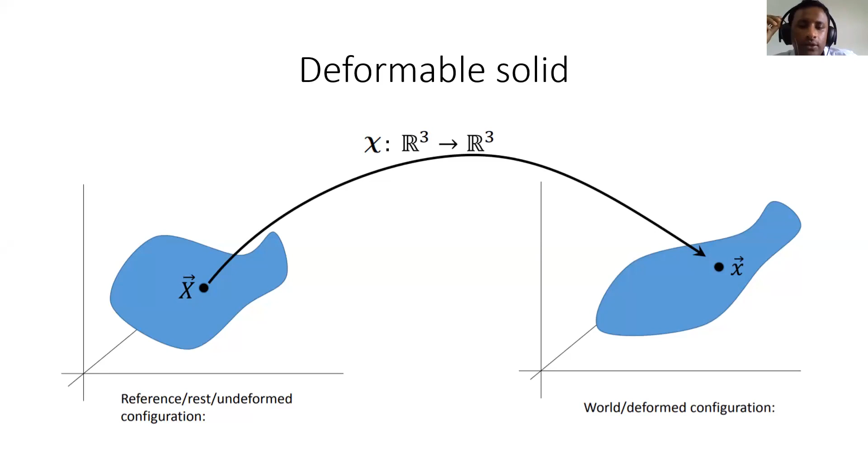Now, where do we need that then? The question is, when you actually go to solve any realistic problem of engineering interest using molecular dynamics, you will face the huge difficulty of scalability. What does that mean? Scalability means you cannot solve any engineering problem of relevance to us using molecular dynamics.

Your computer will explode. The degree of freedom for solving even a small nanometer scale problem itself becomes quite challenging using molecular dynamics. So even though it has the potential to solve everything, in reality it cannot solve almost any problem of our interest.

Now there comes the necessity of something that can be used to solve large scale problems, and that is called continuum mechanics or solid mechanics. We must have read Timoshenko's book, or Euler-Bernoulli's beam theory and all that. But basically this concept of continuum mechanics started with the work of Euler, Bernoulli, Cauchy, these great people 200 years back.

So basically what does it say? It says that solid is a continuum, meaning if I now try to show this, solid is a continuum means there is no gap in this body. Actually, if you use a microscope, you will find that there are lots of atoms or molecules in it.

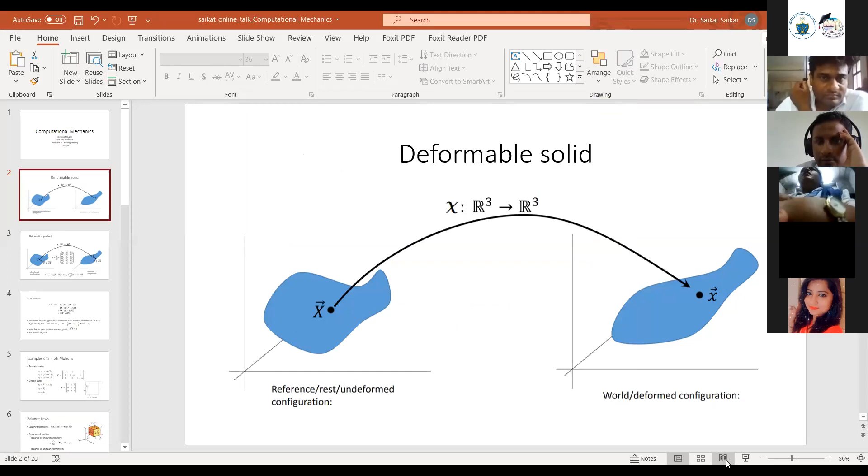Oh, I cannot, one second. Why am I not able to? I'm sorry, actually I wanted to use my pen here. Anyway, maybe that's not possible. Oh my God, why can't I use my pen? Just a second, okay, I'm trying to use a pen. I thought of using an online pen. No, anyway, that's probably not possible. Anyway.

So the point is, you see this blue body, this black is a representative point, its location is X. Now, under some deformation map, the chi is a deformation map that maps a point from R3 to R3.

What is R3? R3 depicts this three-dimensional problem: X, Y, and Z axis. X axis, Y axis, and Z axis. And then after deformation, the problem remains 3D. So that's talking about something very trivial. It's mapping something in 3D to something in 3D.

And continuum means there is no gap, so it's absolutely full, it's a continuum. So you can go to any arbitrarily close point to this point X, capital X. So that deformed point is small x, and the undeformed point is capital X. Now this is the basic point.

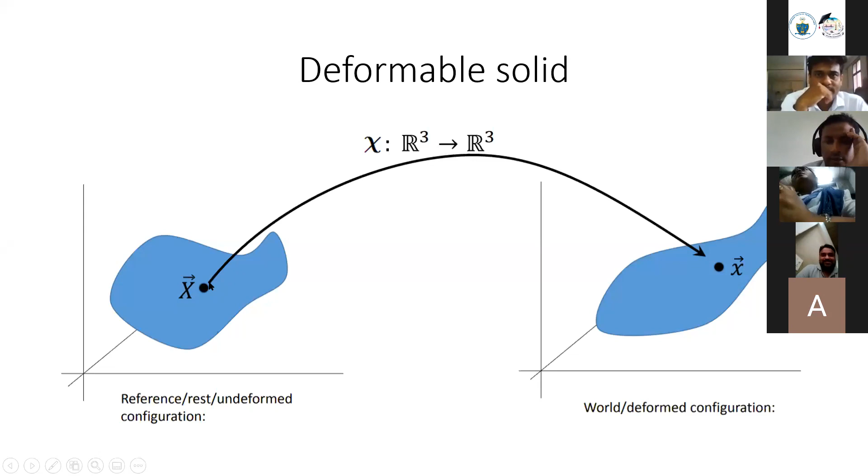But that is not possible in molecular dynamics, because in molecular dynamics atoms are realistic and there are gaps between two points. But in continuum mechanics there is no gap between two points, and that is why you can take a very close point in the neighborhood of the point X, a very small neighborhood of point X.

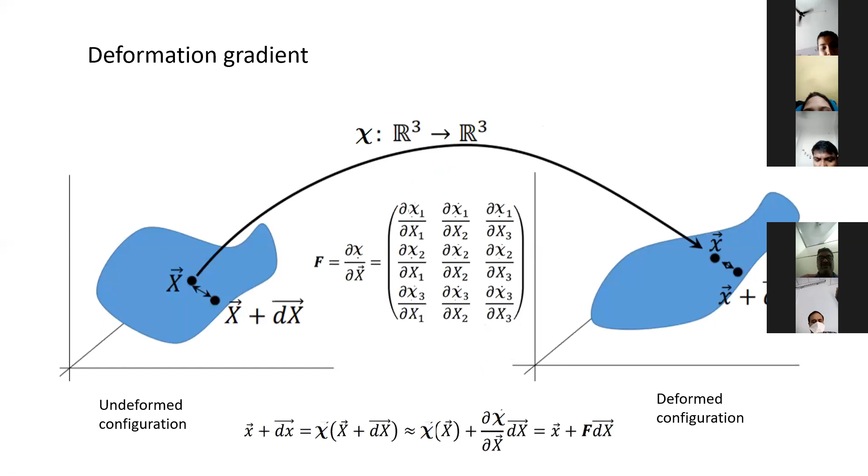So what is ds? In a continuum, a solid body, you can draw a line from any two points, right, because any two points exist. So I call this a fiber, the ds fiber. And what's the length of that fiber? The length of the fiber is small dx dot small dx. So that gives the length of that infinitesimal fiber in the deformed configuration.

And the same fiber in the undeformed configuration, its length was small d capital X dot small d capital X. Okay, in 1D it will be dx square, right? D small x square minus d capital X square. That gives you in 1D how much a fiber has stretched, right?

In 1D, the fiber initially was like this much. Then you apply some force and it expands or contracts, right? It expands. How much has it expanded? It expanded like d small s squared minus d capital S squared, square root of that.

Why are you using the square? Just to forget about mostly the sign, plus minus and all that. And in 3D or 2D, it's nothing but an inner product. In 3D, a fiber stands, right?

What's the length of the fiber? Its initial position is x1, y1, z1, and then here it's x2, y2, z2. The difference is x2 minus x1, y2 minus y1, z2 minus z1, and the norm of that. That's why I'm calling this dx dot d small x, right? And then d capital X dot d capital X is the initial length of the fiber. That's the minimum information we are trying to use.

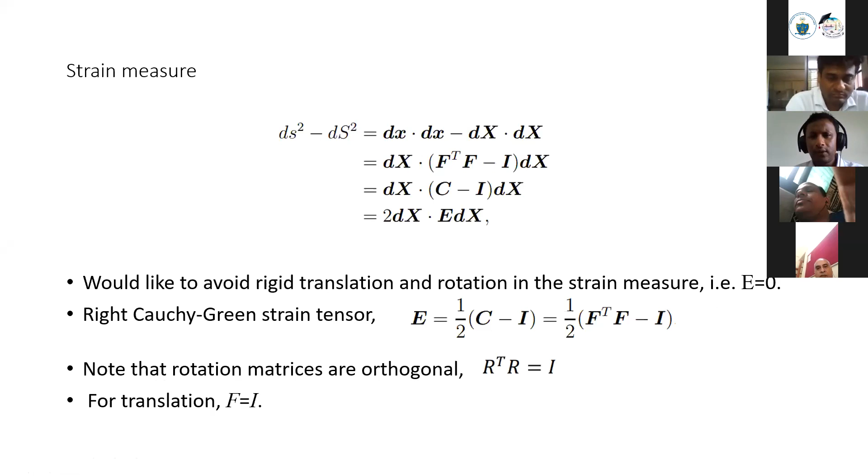And then, if I rotate it, F would be equal to R. Let's say R is a rotation tensor, rotation matrix basically. So F transpose F would be R transpose R, because F is a rotation, since you can characterize any rotation by a rotation matrix for the deformation gradient. Then you know that R transpose R is equal to I, that is orthogonal. R is an orthogonal matrix. So any rotation matrix is orthogonal, and it has a property like R transpose R equal to I.

So in that case, if you replace it here in this first expression, see, ds square minus d capital S square is equal to dx dot F transpose F, that is R transpose R minus I, which is 0. So by rotation, your fiber length cannot change. It's obvious information, but mathematically that gets interpreted like this, because continuum mechanics is all about writing equations and capturing the physical phenomena nicely, right?

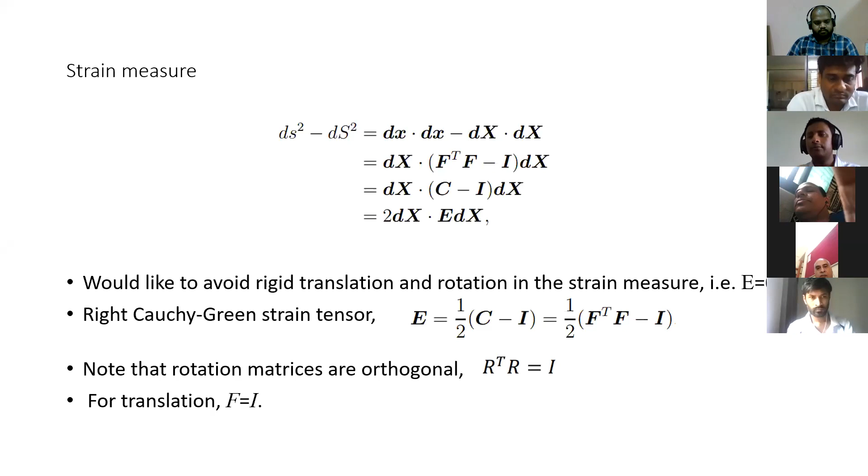So you have to make sure that you're not by mistake understanding a rotation as something like strain. That is another aspect: if you rigidly translate a fiber from one point to another, then also you're not rotating, you're just translating. Then how do you make sure? Then F is not F transpose F equal to I, but F itself is the identity matrix in that case.

Because why? Because what is F? D capital X equal to D small x equal to F D capital X. By rigid movements, your D small x and D capital X are the same. Then your F has to be identity. So by construct, F transpose F becomes identity. So F transpose F minus I is 0.

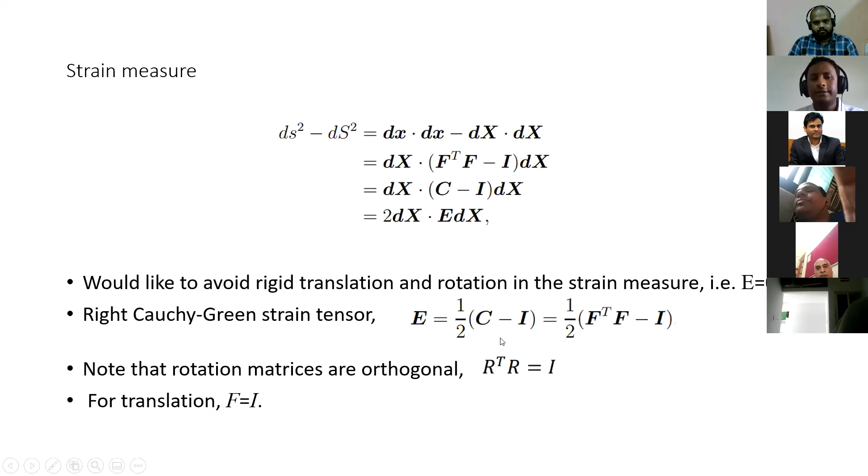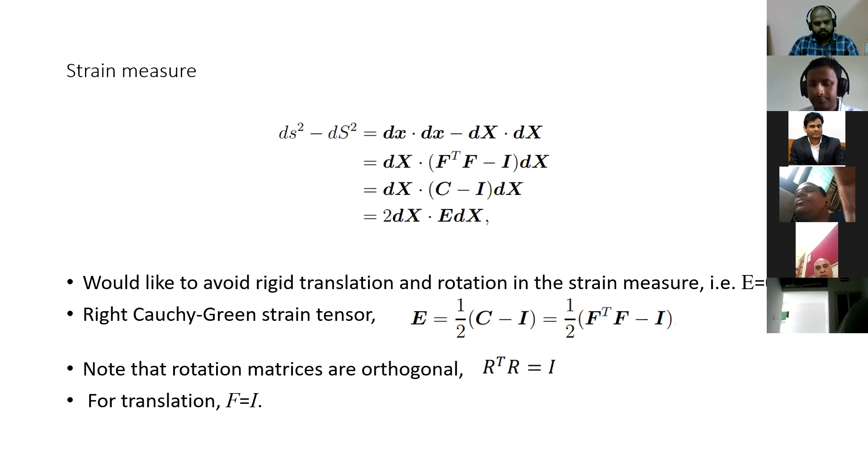So your simple ds square minus d capital S square, the stretch, the measure of stretch of a fiber, captures only the strain information of the solid continuum. That is why E is a correct strain representation. Any derivative does not need to be strain. It has certain properties. So these are the two properties by which we understand that something is a correct strain measure. Okay, with that we will go to the next.

So when we study continuum mechanics, we should start with the simplest of the problems. What is the simplest of the problems? It is pure extension. You take a bar, you pull the bar or push the bar. In this setup, how do you characterize that pure extension?

Have you ever thought? Suppose a solid, a rubber, if we pull a rubber, you see a thinning effect of the rubber on the other side. You pull it, its length is extending, but it cannot change its volume, right? It cannot change because the rubber's volume needs to be fixed. So your other dimensions need to shrink in a particular manner. That is why here I am just writing a rule.

Let us say small x1 is equal to 1 plus epsilon times capital X1. This means the initial length of that fiber, or bar, was X1, and I am extending it by epsilon amount, so 1 plus epsilon X1 is my changed length. But since I am increasing the length in the X1 direction, along X2 it should reduce: 1 minus nu epsilon X2. So the initial length was X2 in 3D, and now it has changed, reduced by the nu epsilon amount.

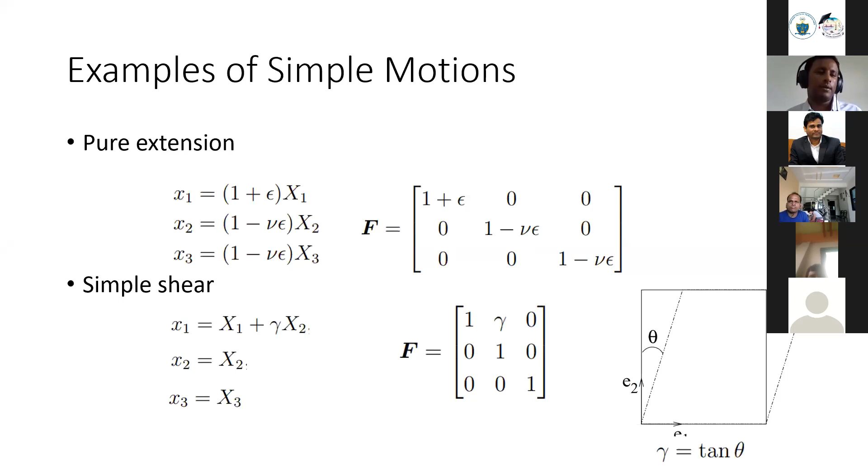Okay, so if you do that, let us come to the next aspect. I'll not take much time, but these are all big issues. So the second thing is T is equal to tau n.

What is this, T equals tau n? That's called Cauchy's theorem. So towards T, small t is traction. Just think of this famous problem. The notations are slightly different, I've taken it from somewhere anyway. So the traction on the surface.

So what is traction? Traction is force on the surface divided by the area. As area tends to 0, it becomes traction at that contact area. So on the surface, however much force you are giving, that's called traction. Now this tau is stress, so that's happening inside the body.

This, Cauchy did this derivation. T equals tau n. N is the normal vector. Okay, on this surface, so at any point on the surface, your normal vector is n and traction is t. If you know these two, you can compute how much stress it should have.

So what is stress in a three-dimensional setup? Stress is, by definition, pretty simple: force per unit area. So if you cut a section, compute the force on any plane, you will see how much of stress it is. Now, since it has 3 dimensions, it has all the components.

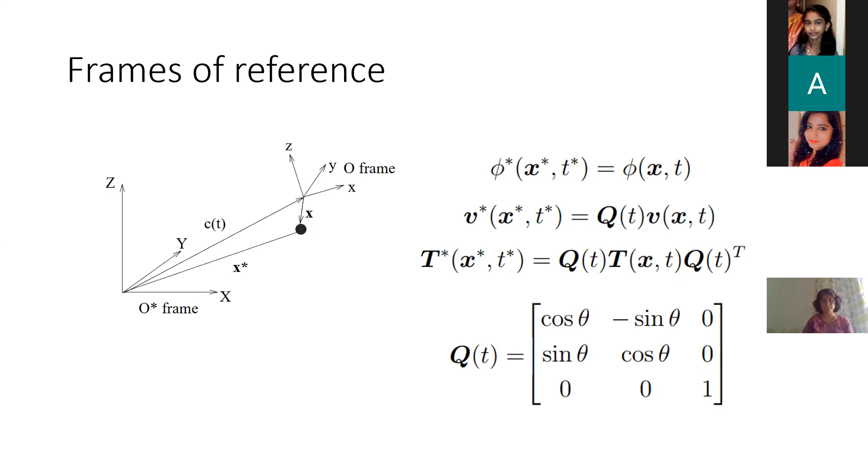Once we have done that, then comes another aspect. What is that? Frames of reference. Because you may be using solid mechanics for solving a moving car, or a merry-go-round, or a moving ship, or a building, or a bridge that's vibrating, right? So the deformation or vibration phenomena of any structure, we civil engineers call everything structure. Okay, we see it from a frame of reference; we have x, y, z, that's the frame of reference. Now if you change the frame of reference, how does the law change?

That is quite important, because if everything changes you should be careful, right? You should know what's the rule of shifting from one frame of reference to another frame of reference. Here I've given two frames of reference: one is O star, one is O. Let us say you have a scalar variable that is phi.

Let's say it is density. Density should not change by changing your frame of reference, right? Because it's a material property. But mathematically you're writing an equation, and the equation does not know whether it's density or displacement or whatever. So you should make your equation understand what is physical and what is unphysical. To do that, we have to have this extra measure.

This is the next step: to make sure that your scalar variables follow the rule of frame of reference, that is phi star equal to phi. And if V is a vector at a certain frame of reference O, then it should transform into QV in another frame.

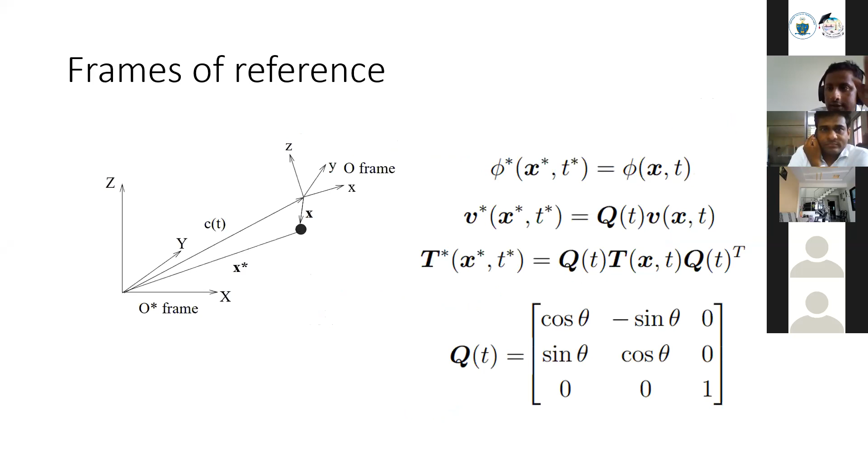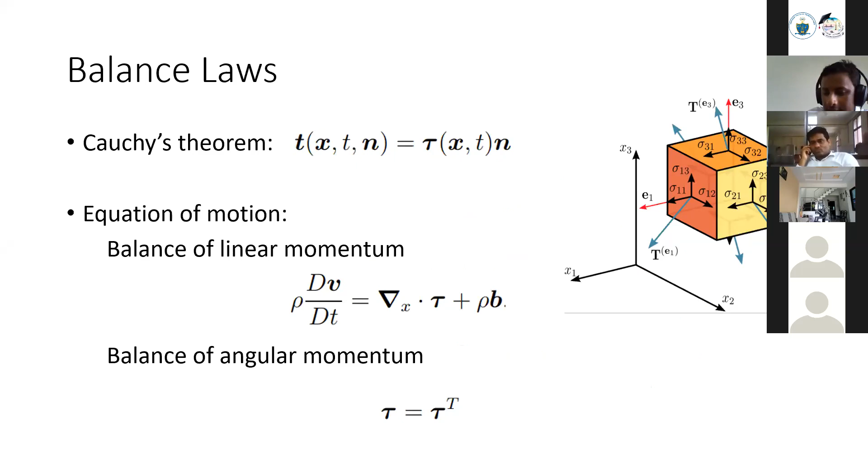That is another important thing, so that is called constitutive relation: to know tau or stress with respect to strain. If you know tau with respect to strain, that is displacement variables, the derivative of displacement, you can solve this equation. Then your problem is closed, but not without knowing the constitutive relationship of a material. So for a material, you must be knowing the constitutive relation to be able to solve it.

As I was saying, isotropic elasticity is equivalent to doing this operation: tau f Q, Q is that orthogonal matrix, is equal to tau f. So if your deformation gradient undergoes a certain frame of reference change, your stress should be the same. That's equivalent to saying that it is an isotropic material. Why? Because as the deformation gradient derivative information rotates the reference frame, you are still getting the same stress.

That can only happen when your material is isotropic. So you are measuring your stress in a certain reference frame, you change the reference frame, your stress is still the same - that can only happen when your material is isotropic. Cauchy stress can be written like this, and then second Piola, first Piola stress can also be written, so you see there are Q's coming in. If your deformation gradient undergoes certain rotation, a change of frame of reference, then your Piola-Kirchhoff stress looks a different form. And if it gets this specific form, then the material has to be isotropic. That's a mathematical way of understanding whether a certain material is isotropic or not.

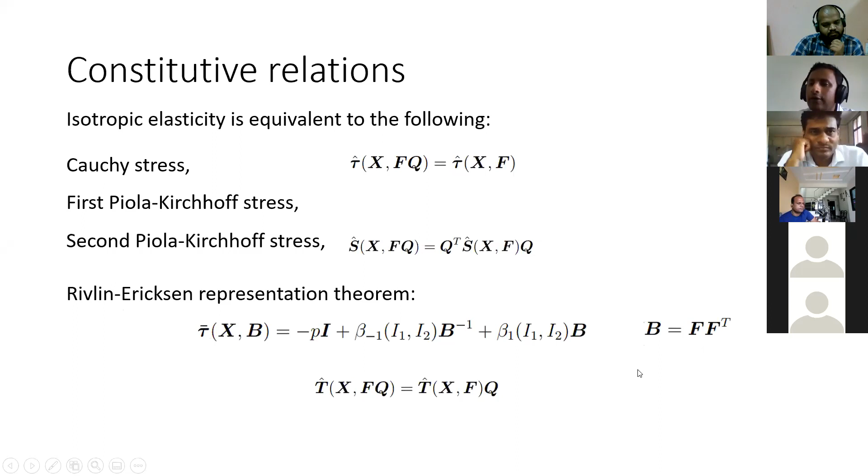Okay, in a generic way. Sigma is equal to E epsilon falls within this, but you can get nonlinear materials, like geosynthetic materials, rubber materials, polymers, where you don't get linearity. There you have this generic representation of materials.

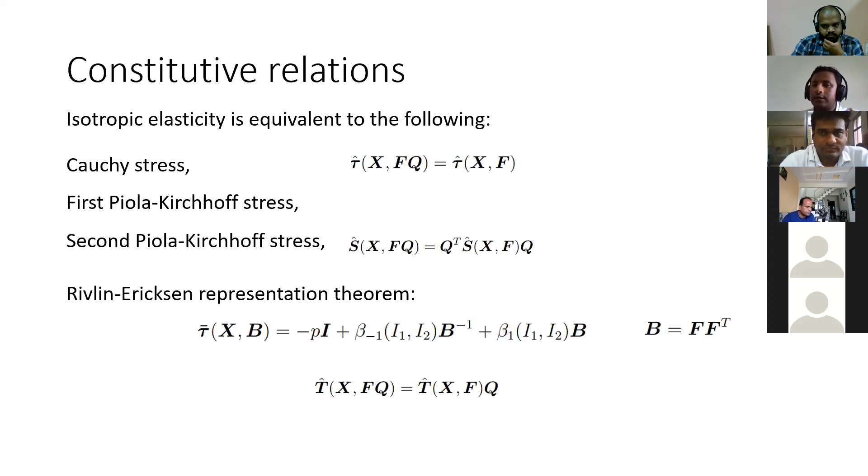So beta -1 and beta 1 are experimental parameters, which you find from experiment. If you find that, then you get tau and F, deformation gradient and stress, connecting these two. Once you've connected these, you have a proper constitutive relation for your problem. Now this beta -1 and beta 1 are very interesting. People have done experiments and found that beta -1 is typically negative and beta 1 is typically positive. This is an experimental observation.

Once this beta -1 and beta 1 are some non-zero constants, then we get Mooney-Rivlin material, for example rubber. And if your beta -1 becomes 0, your tau is equal to -p plus beta 1 b. You don't have this beta minus 1 b inverse term if beta -1 is 0. That is called neo-Hookean material. Hookean material, like steel, up to linearity follows Hooke's law, right? Rubber does not follow Hooke's law.

Then that rubber is called Mooney-Rivlin type of material. Neo-Hookean may be a plastic type of material. There are different materials which have different stress-strain relationships, found from these two parameters, beta -1 and beta 1, in this Rivlin-Ericksen representation - the most generic way of understanding material property.

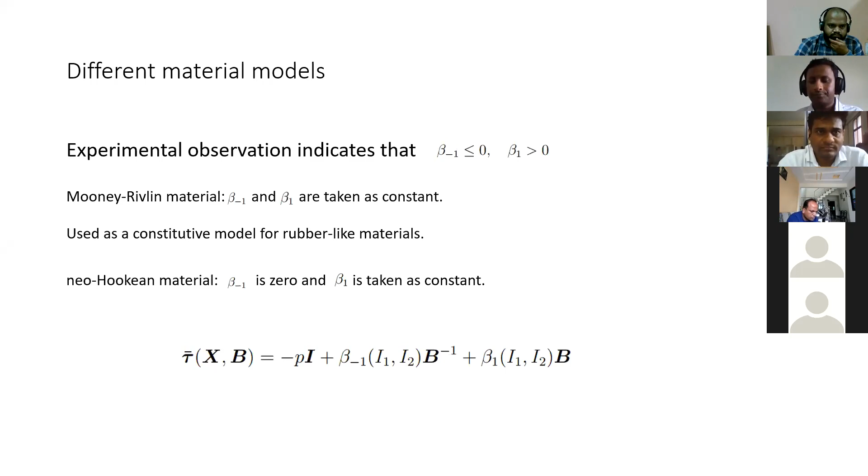Okay, then I'll summarize, I'll switch off all the maths. Take a simple problem, very simple problem: divergence of sigma equal to B. That's the linear momentum balance equation. Divergence of sigma is equal to B. That is linear momentum balance.

And since sigma is symmetric, you have already taken care of the angular momentum balance equation. And your density is constant, so you have already accounted for mass balance. There are three balance laws that you must solve: mass balance, linear momentum balance, and angular momentum balance. These three are for conservative systems.

If the systems become non-conservative, then you have more equations, that is energy balance, temperature balance. These are different things, we're not talking about that. We're talking about a conservative problem where there is no dissipation, no friction, nothing. Then you have three equations.

Mass balance is accounted for because you assume density is constant throughout the evolution of the problem. Then you assume your sigma is symmetric, so you have already accounted for angular momentum balance. So only one equation you have to solve for, and that is what you solve.

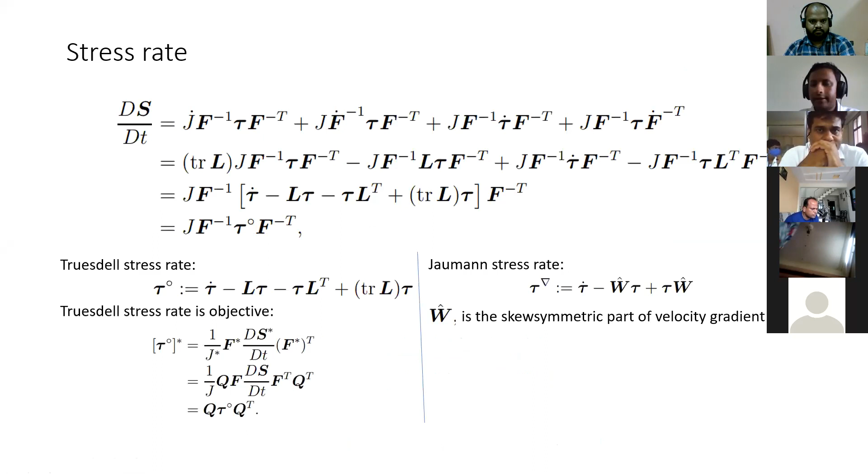So what we have learned here, first thing is the Dirichlet boundary condition, or displacement boundary condition, and Neumann boundary condition, or natural boundary condition. They cannot overlap with each other. They are disjoint.

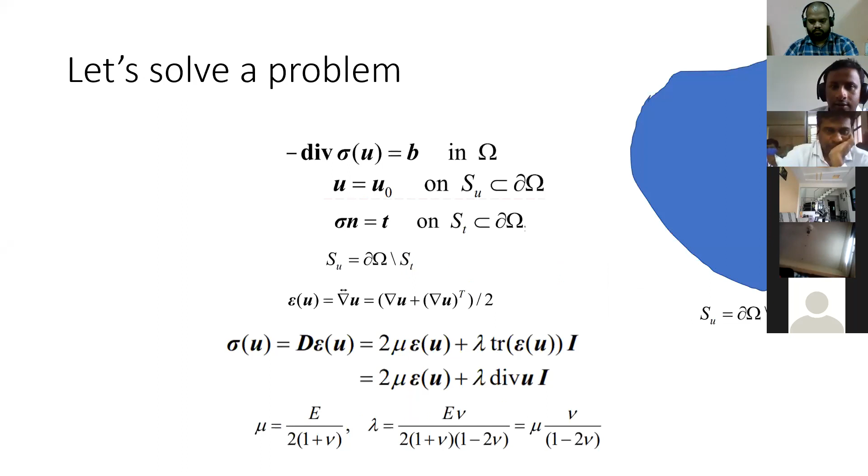Then we come directly to FE discretization. So we discretize this domain by small meshes. Here we are talking about some finite elements. So we need a background, but how much time do we have? I think we are almost done, right?

Okay, so I'll quickly go through this. We discretize a body with regular shapes. It can be boxes, it can be pyramids. In 2D, it can be rectangles, where we can numerically solve the problem easily, and then we assemble the small pieces and make a big building. That's what finite element is about. Your element is a finite domain - not very small, not very large. So it has a domain, that's the finite element method.

So we discretize that field variable, that is u, displacement, as ni ui. N is a shape function, u is a displacement. But these ui are displacements only at the nodes of the finite element, and with that you are approximating the displacement at any point within the domain.

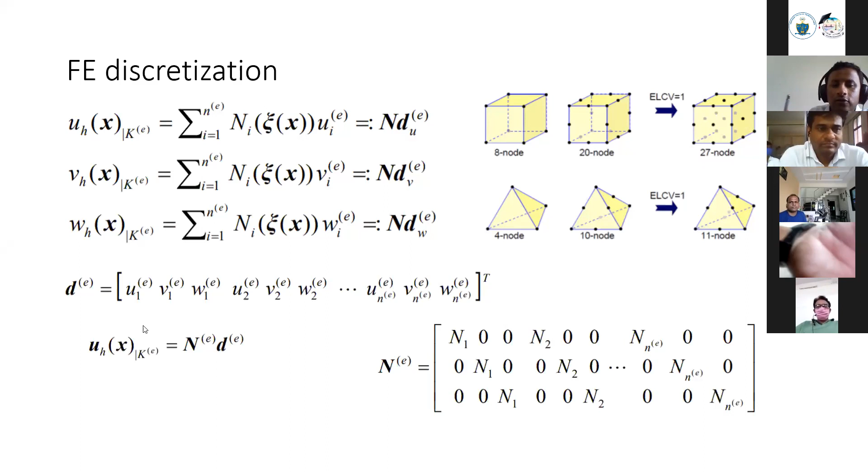So your ux is a field variable, that is a continuum variable. Since you cannot solve the problem exactly for any engineering problem, the first thing we did was finite difference, long back. What was that? That was du/dx equal to u2 minus u1 by delta x. So you are approximating the derivative by two nodal values, u2 minus u1. But that turned out not to be sufficiently correct for many of the problems.

So we tried another approximation: you take a small portion of the whole body and then approximate ux as summation of ni ui. On that small portion, the domain boundaries are like nodes. So in case of a box, it is 1, 2, 3, 4, 5, 6, 7, 8. So the number of nodes for an element is 8 in that case.

So once you have discretized this, the ni's are functions of space, that is x, and u's are functions of time in case of a dynamic problem. Then you just put this discretization back into this equation, divergence of sigma equal to b, and then you solve it weakly. What does weak solution mean? You multiply with this shape function on the left hand side in addition, and then integrate over the entire domain of that element. Then you get back equations like this.

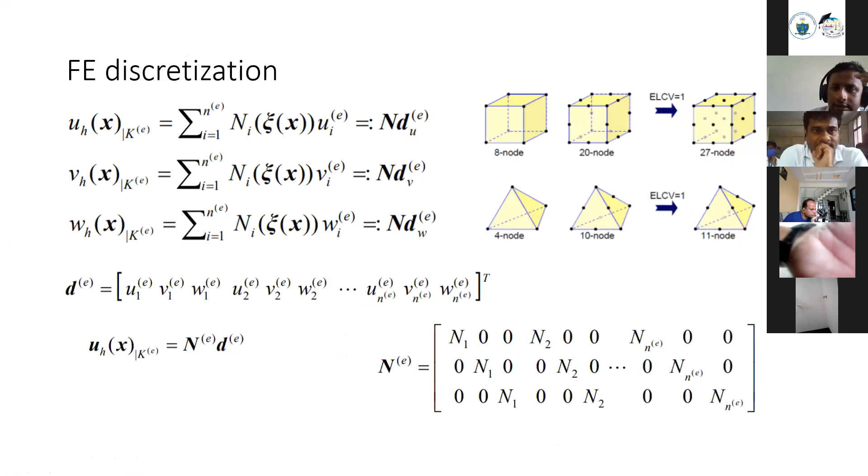So n is the shape functions matrix, and d is the displacement, the nodal displacement vector. I'm just quickly going through this - if you have any question, you can ask. Okay, then we solve that problem. How? Oh my God, where did it go?

To make it more explicit, I've taken an even simpler problem. That is, dou sigma xx by dou x plus dou sigma xy by dou y equal to 0. Dou sigma xy by dou x plus dou sigma yy by dou y equal to 0. Simple 2D equation. Then the constitutive relationship is sigma xx, sigma yy, sigma xy equal to some constant matrix into epsilon xx, epsilon yy, and gamma xy, that is strain. So stress equals some matrix into strain, a linear Hooke's type of constitutive relationship.

Then strains are related as - what is epsilon xx? That is dou ux by dou x. Epsilon yy is dou uy by dou y. If you arrange it in matrix form it looks like that: dou x, 0, 0, dou y. Then the last one is dou ux dou y plus dou uy dou x. So that is how the strains are.

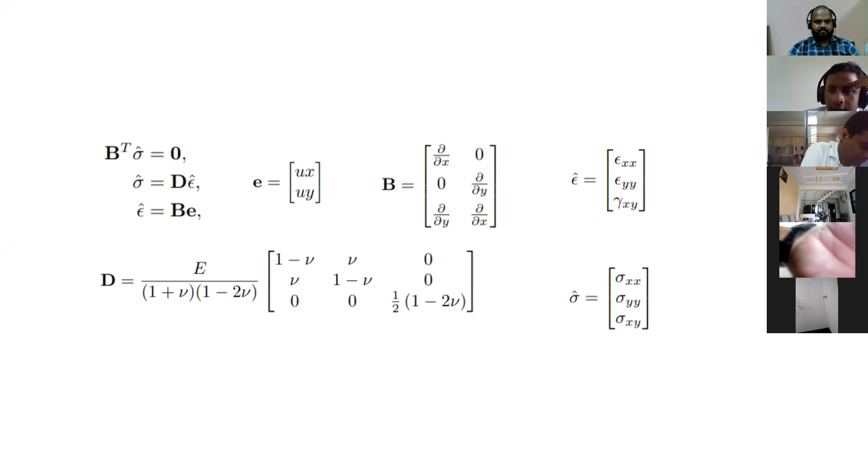Then we write, what is b? B is that dou x operator, the differential operator - that is dou x, 0, 0, dou y. So b is that differential operator into sigma. The equation we just wrote can be written in matrix form as b transpose sigma equal to 0, and sigma equals d epsilon. D is that constant matrix we just saw, epsilon is the strain vector we just saw. Then the problem remains to discretize u as ni ui.

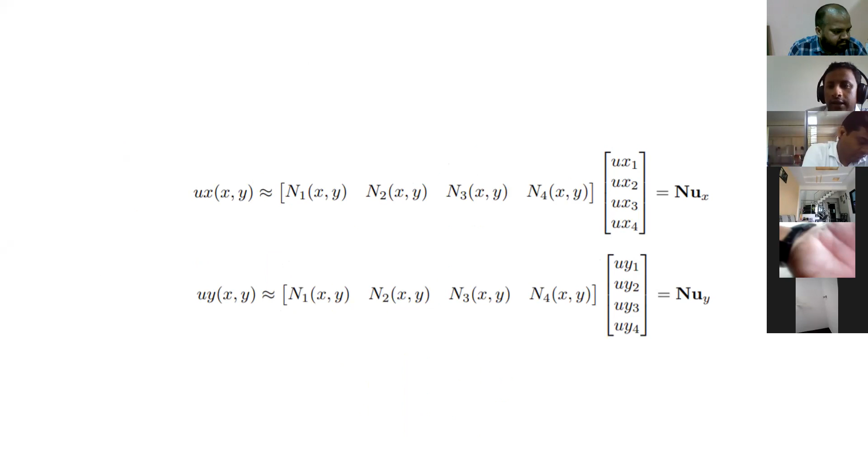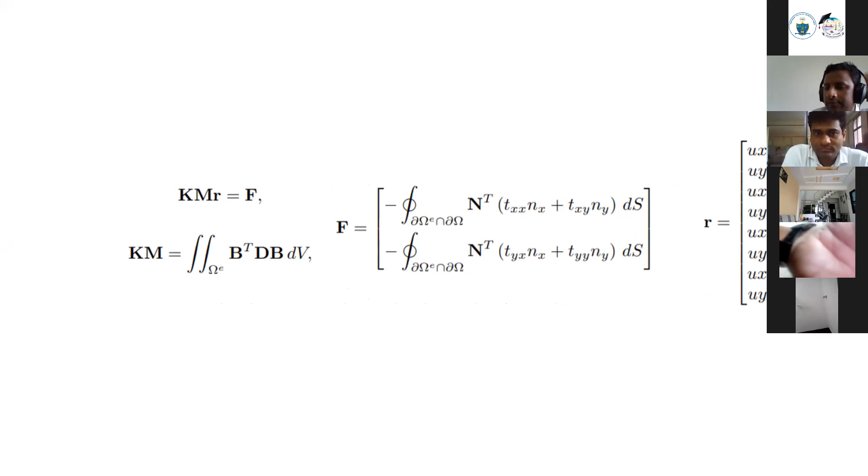I think I have finished it well before, but I have done this purposefully just to make sure we have ample time to discuss if we want, because it's a very heavy thing, I think. So probably Dr. Rajan can ask if anyone has any question.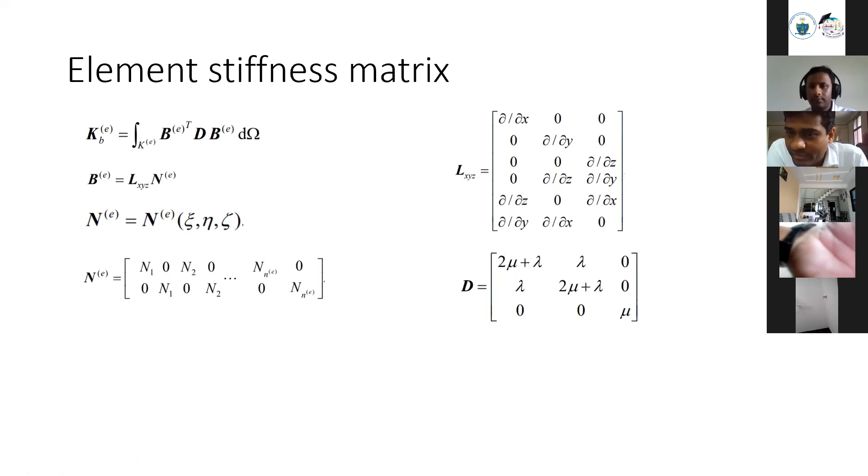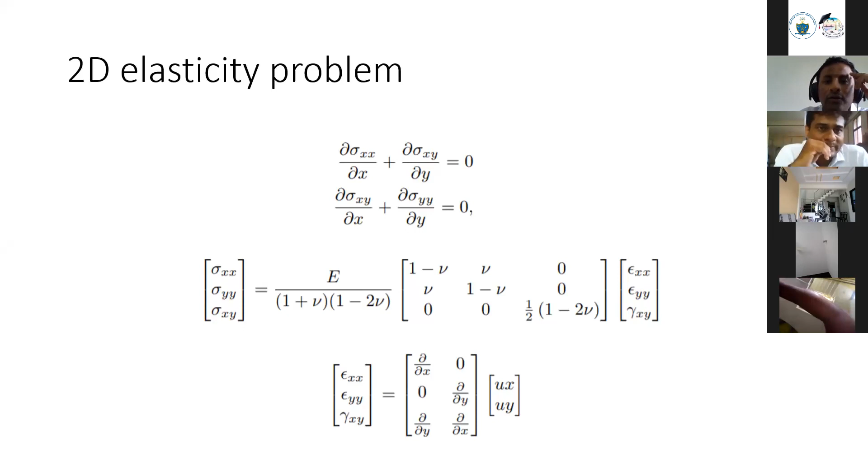So what is the effect of non-associated flow rule on bearing capacity of a strip footing? That's a different point of view, a different question altogether. Bearing capacity of a soil is an experiment - you go to the field and measure it. That's a different point of view. We are mostly interested in the deformation of the footing, whose effect comes from the soil. So let's not try to bring everything together, because soil is a very different thing altogether.

Traction is a tensor of rank 1 and stress is a tensor of rank 2, with 9 components - what is the question? I'm not probably getting it. Rank is fine, but traction is a vector of 3 dimensions. So traction is a 3-dimensional vector, and stress is a 3 by 3 matrix. I'm not able to get the question properly - if you could make it clearer, I could try to answer that.

For FEM, is there any rule for deciding the number of nodes? That's a very good question actually. See, there are two things in FEM: one is H, one is P - that's why it's called HP refinement. H is the length scale of an element. Either you increase the polynomial order of the finite element mesh, or you use smaller elements. If you increase the polynomial, your accuracy goes up. If you increase the number of nodes, your accuracy goes up. So both ways you can increase accuracy, and there is no end to refinement - you can go to infinitely more nodes to increase accuracy. But the question is, do you go for that?

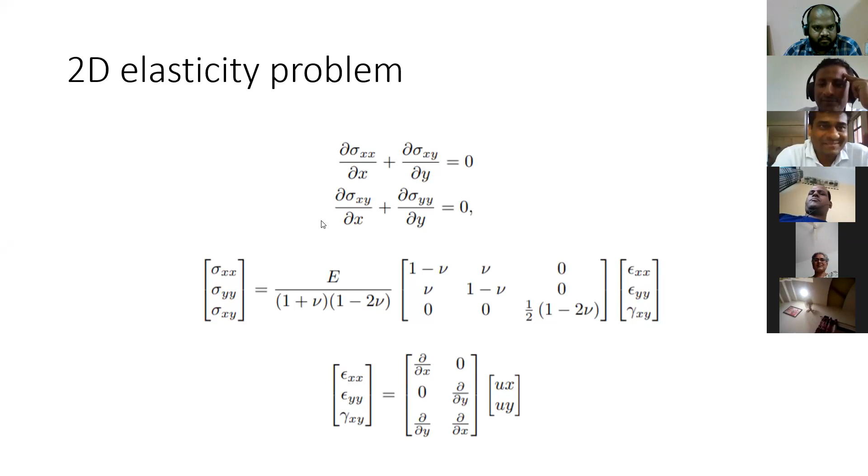Shall we conclude now? Yes, I think there are many questions we can discuss if anyone is interested. Yes, many questions now. Because within a short period we cannot cover answer to each and every question. But you have addressed many questions. Thank you. I tried. Okay, so I will conclude now.